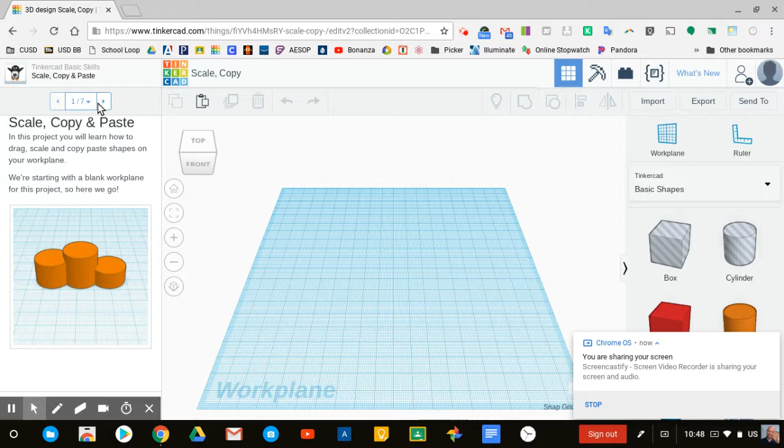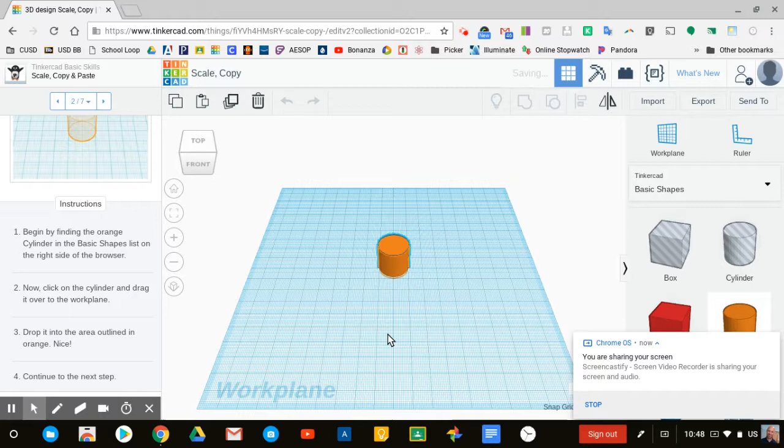Step 2, it says we need to add some shapes to the work plane, so it's going to walk us through the different steps here. I'm going to use my scroll wheel on the left-hand side, find the orange cylinder in the basic shapes on the right side of the browser, and drag it into the work plane. So here's my orange cylinder. We're going to go ahead and bring that over, drag it into the work plane and line that up there. Zoom in on that one.

A couple of cool things while we're working with cylinders here first, just things that I've noticed. On the inspector window here, we have options called sides, and watch what happens when I increase the number of sides to this object. Notice how much smoother those edges get on that object. That's kind of a neat trick. So I highly recommend, if you want a circular cylinder, increase your number of sides. I'm going to go ahead and drag that so it's lined up with our object there.

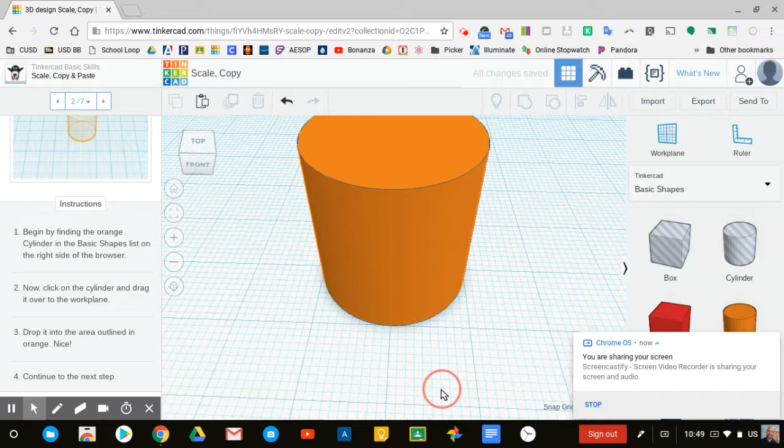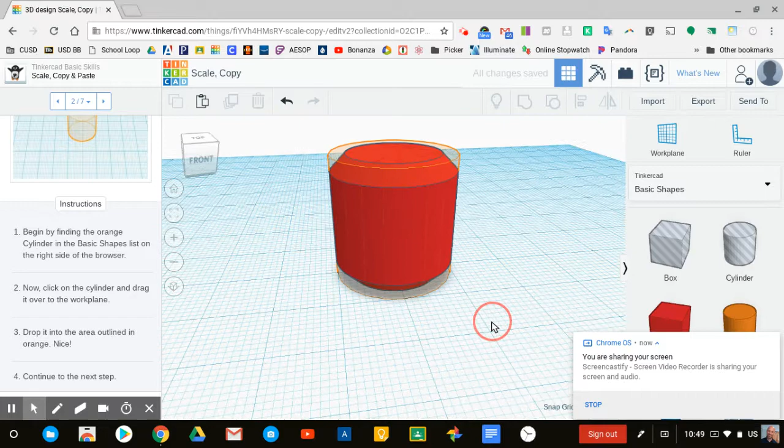Other features here when you're working with the object, you can always change the color. Don't know why, but there you go. Color is going to be determined by the actual color of the filament that you print in. But color can be kind of neat when you're designing things and you want to show different types of surfaces. Bevel is another option here. What bevel does is it smooths out those edges. So you can see here and play around. Notice what happens when I bevel this one out. I don't want to bevel this one because I want it to look like the tutorial.

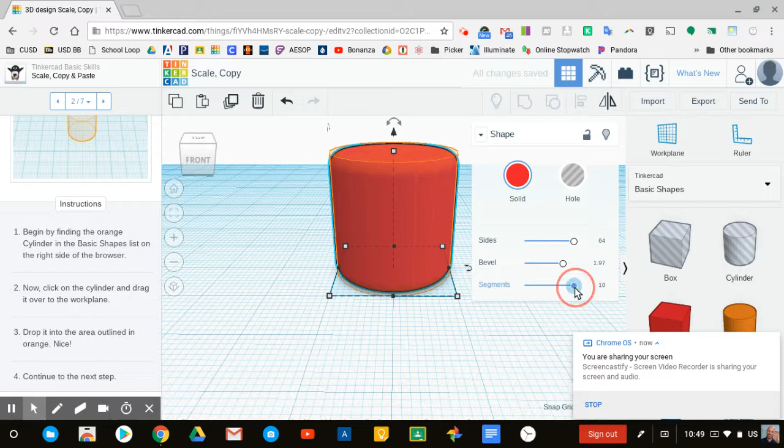And then segments does something similar here. It just kind of increases the smoothness of this object if we are dealing with a bevel. So you'll notice if I do segments and beveled, I get kind of a rounded object. If I lower the number of segments, then my bevel is more angular. Just some neat things that we can go ahead and play with. I want that to be a cylinder, so there we go.

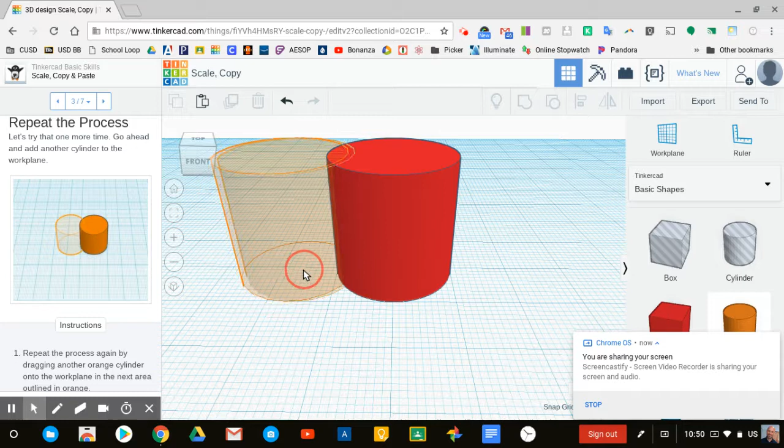Okay. Next step. Repeat the process. Let's try that one more time. Go ahead and add another cylinder to the work plane. So I'm going to add another cylinder here. I'm going to pop it right there. Line that one up. This is where having a mouse is really, really important, just because moving around with a touchpad doesn't work so well for me. I'm going to smooth that one out again as well. And hey, let's make it the same color. Might as well. Okay, cool. So we did that. Great work. We go to the next step. They keep these things nice and simple for us.

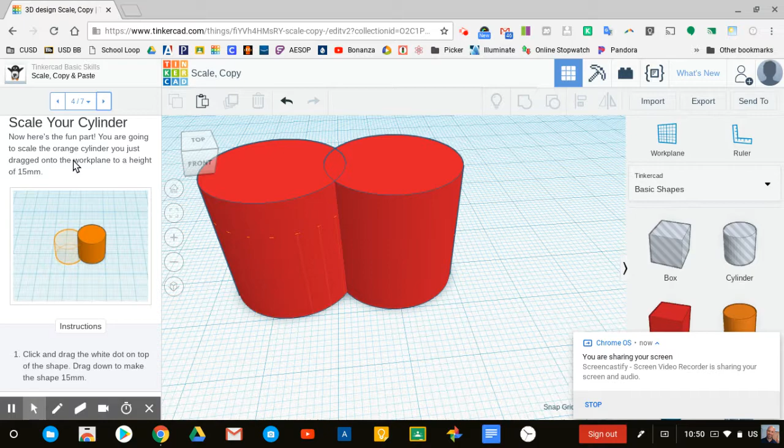Now here's the fun part. You're going to scale the orange cylinder you just dragged onto the work plane to a height of 15 millimeters. So we're going to take this one and just click on it. And see this little white dot?

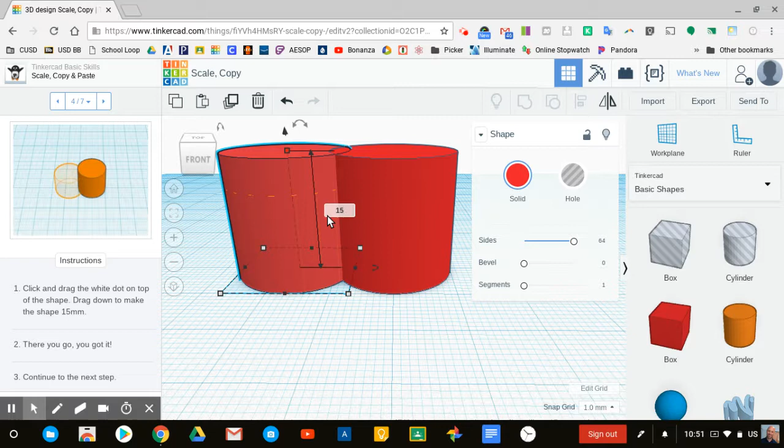This is where we can add our measurements. So our measurements are important when you're drafting and building things that are meant to be in existence in reality. You want things to come out the right size. So I can go ahead and click here and I can add 15 millimeters. Boom. And I say, okay, and there it is, 15 millimeters high.

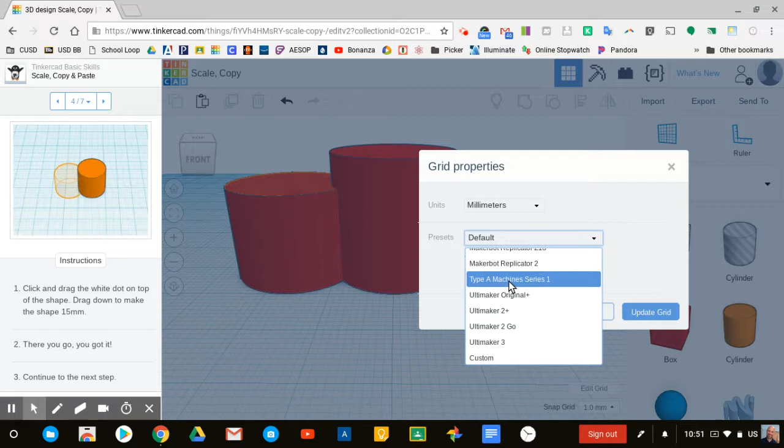Now under Edit Grid, I'm going to show you this while we're here. I can actually have this be in inches if I'd like. I prefer the metric units. They're nice and easy to work with. I can also change things like my particular bed. So if you're working with a particular printer, like we've got a Type A machine in our makerspace, we'll put that one in. You can change the dimensions of the work plane to match the 3D printer that you're actually working with. So I'm just going to go ahead and leave that, but I thought I would show you that real quick. So that's 15 millimeters, and let's go ahead and go to the next step.

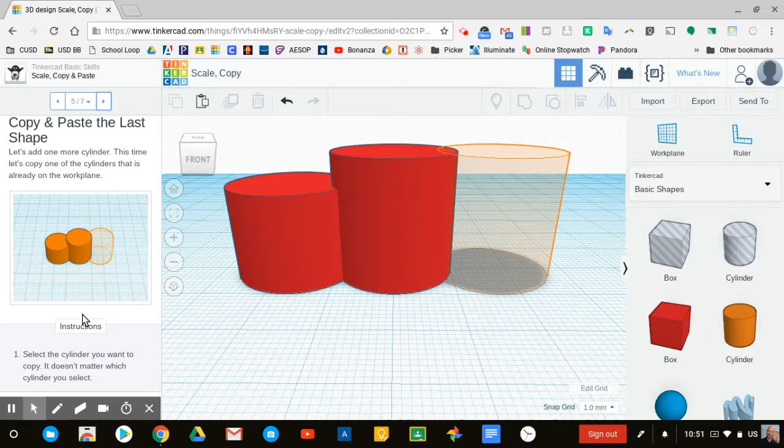Okay. It says to grab another cylinder. Select the cylinder you want to copy. It doesn't matter which cylinder. Let's go ahead and grab that first one. So if I grab that first one and we hit Control C, just like when you're working in Microsoft Word or Google Docs, Control C is the copy command. And then we're going to click away, and then we're going to click Control V. And that gives us a copy or a duplicate of that particular object.

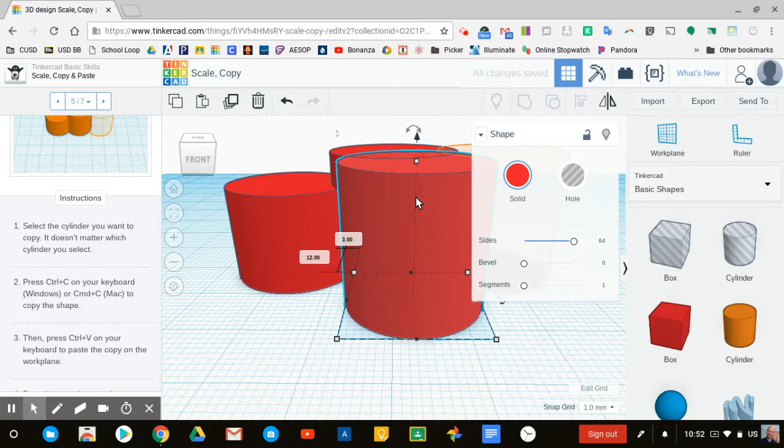Now, there's more than one way to do that also. I can click on this object and I can just press the duplicate button. And now it's duplicated it that way as well. So you can use Control C and Control V, or you can just use that duplicate button. And we're going to drag that to the area on the work plane that's specified. Shift, right click, moves me over. I get rid of that inspector window. And let's put this where it goes. Perfect. And then continue to the next step.

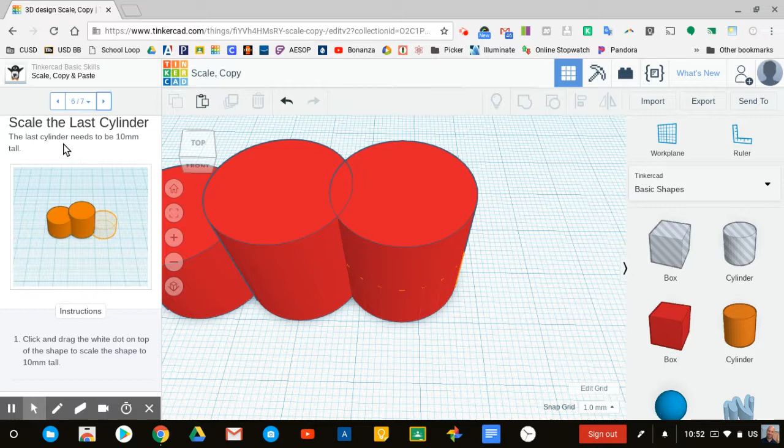And scale the last cylinder. So we're going to click and drag the white dot on top of the shape to make it 10 millimeters tall now. So here we go. We're going to click here, and we can make this 10 millimeters tall. Boom. So I've got a tall one, a 15 millimeter tall one, and then a 10 millimeter tall one.

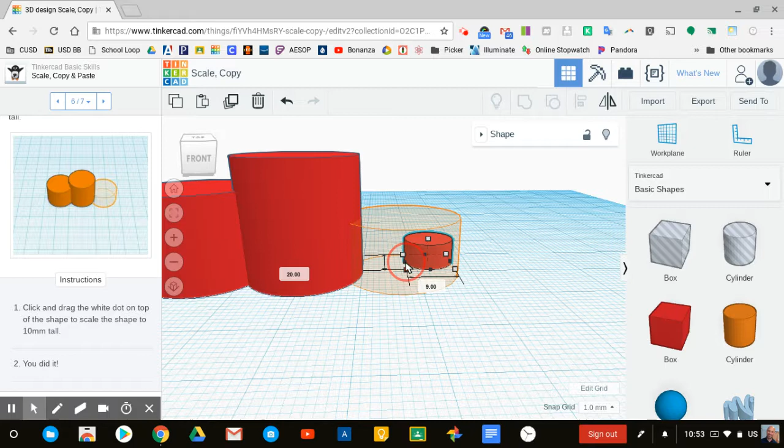Notice too, vertical is not the only dimension. The Z axis is not the only dimension that I can scale. I can scale in the X axis, I can scale in the Y axis, and if I want to scale all of those things together, I can grab a corner, press Shift, and this will shrink the object proportionally. So the X, Y, and Z axis get shrunk proportionally. If you ever do something in Tinkercad and you don't like that change, you can hit Control Z, and that'll take you right back to where you were. So there's a couple of useful tips for you while you complete that scale, copy, and paste tutorial.

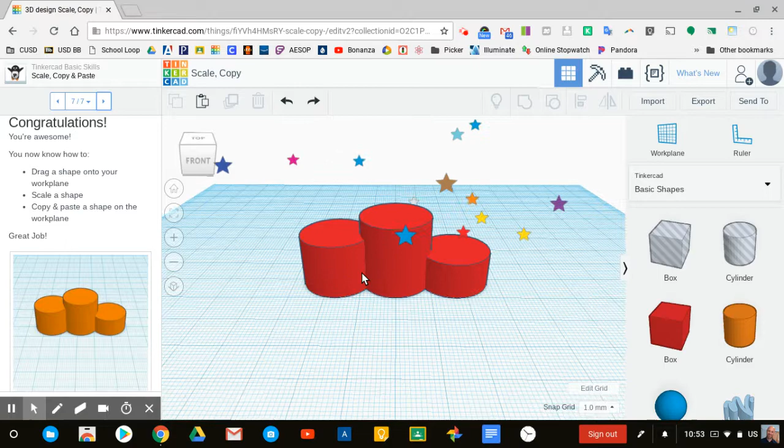It says we did it. Let's go to the next step. Let's get those fireworks to show up. It says, congratulations, we did it. So if you are done with the scale, copy, and paste tutorial and you need to show evidence of your learning, this would be the point where you'd want to do a screenshot. All right, I hope you found that one helpful.